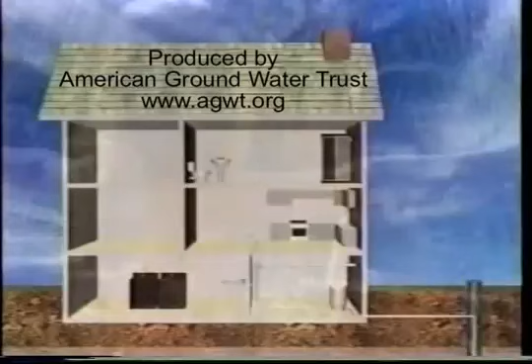Not many people know how wells and water systems work. So let's take a look at the key parts that make up a typical home water system.

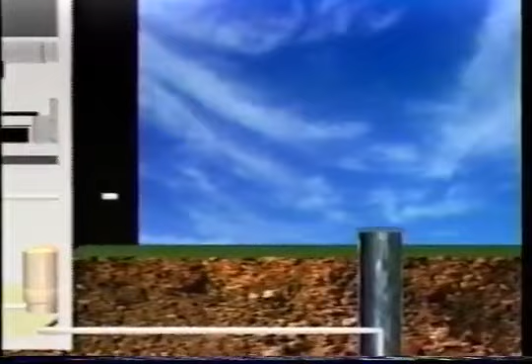First is the well itself, a shaft or deep hole in the ground extending down into the water-bearing formations. The average well is about 200 feet deep, and most are drilled by specialized drilling equipment.

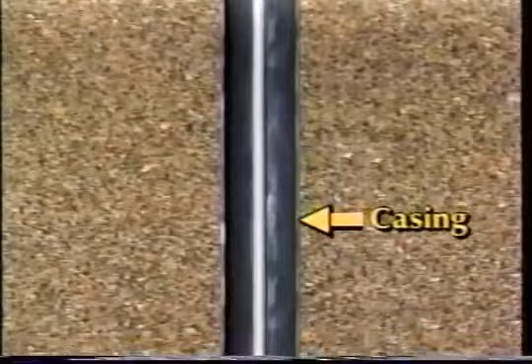Casing must always be placed in the top part of the drilled hole to prevent the risk of surface water getting into the well. In some types of rock formations, casing may extend much deeper to prevent the hole from caving in.

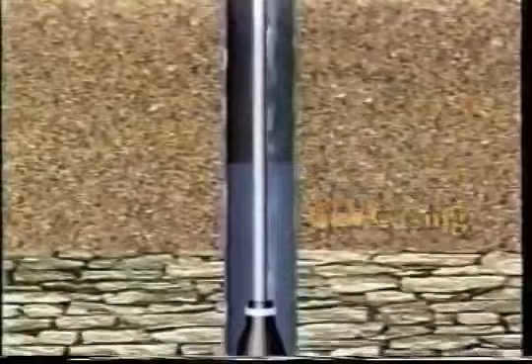Some wells use a well screen to let water in and to keep sand out of the well.

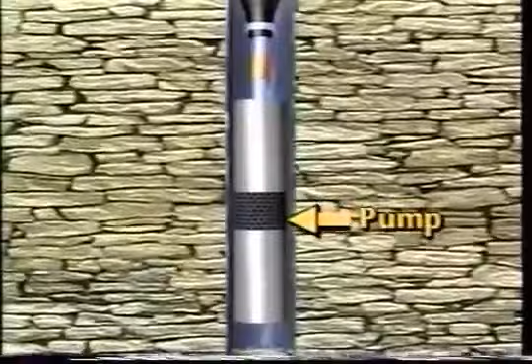A pump is needed to get water out of the well and into the home. Water from the aquifer is pumped from the well into a pressurized tank, which stores water for use when the pump is not running.

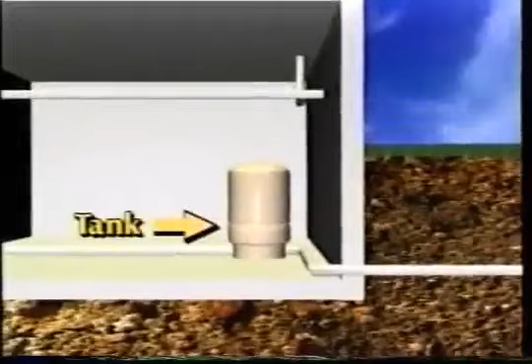From this distribution point, water is piped to individual use points in the home.

The planning, design, and construction of a water well and home water system needs to take account of geology and environmental conditions at the building site.

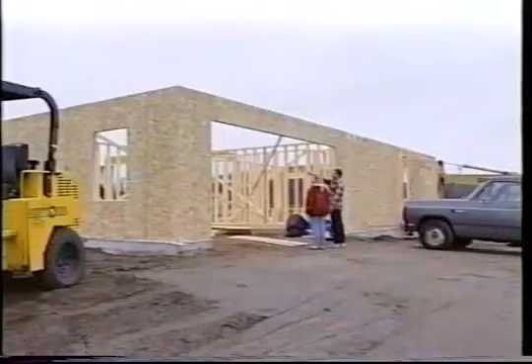The first step is proper planning. How much water is required to meet the needs of expected water usage in the home and garden? Where should the well be drilled? What well yield will we get? What water system equipment may be needed to provide a reliable supply?

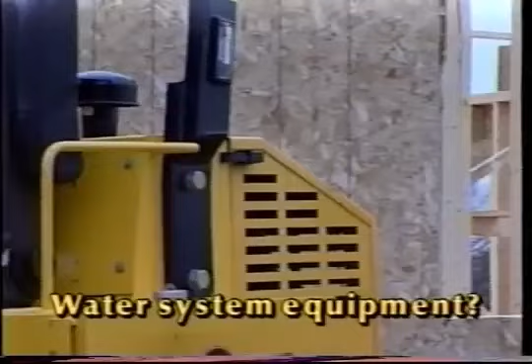The builder or homeowner should get expert advice about the availability and reliability of local groundwater and the safest place for drilling before the first dirt is disturbed.

This is the time most prospective well owners turn to experts. The drilling contractor will have current information on any state and local environmental restrictions and permits required for drilling, as well as mandatory construction standards for water wells.

The driller can recommend the best place for a well based on the character of the soil and bedrock and the required distance from other structures or possible sources of contamination.

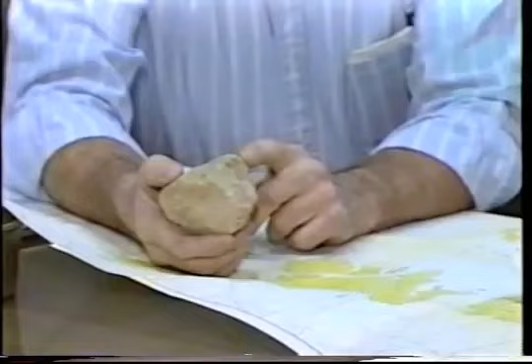A water well contractor with extensive experience in the area will have records of previously drilled wells. These records provide helpful information on the location, depth, and typical water yields from nearby wells.

In low-yielding rock formations, a well probably will need to be several hundreds of feet deep in order to provide adequate supply. But a well yielding as little as a half gallon a minute can still provide 700 gallons a day, more than enough for a family's needs.

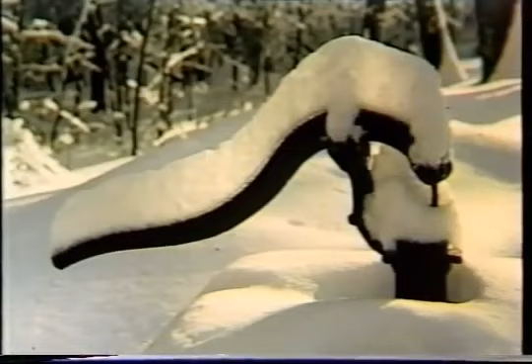Homeowners need to know the capacity of their well. Virtually all wells will provide enough water for in-house needs, but not all wells can support garden and lawn irrigation systems. Back in the early days of rural settlement, water wells may have just been hand-dug holes in the ground.

Today's water wells use modern technology to efficiently reach the aquifers, and contractors use accepted well construction methods to ensure that the well is safe from any surface contamination risks and will give the best yield available from the formations.

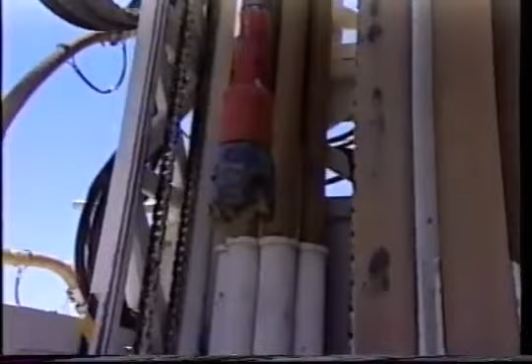Several techniques are used to drill water wells. The most common is the rotary drilling method. Other methods are cable tool, jetting, and driven well points.

In rotary drilling, a drill bit is attached to a string of drill pipe. As the drill string is rotated, the bit acts as a grinding machine.

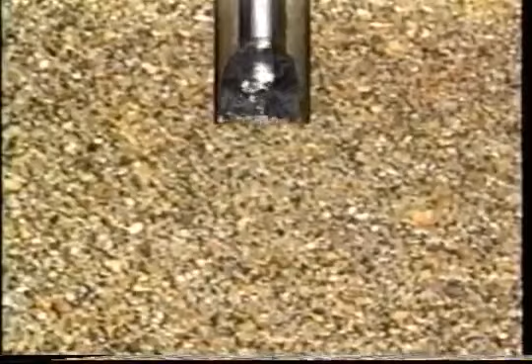Cuttings are flushed upward and out of the hole by circulating a special drilling fluid called drilling mud down through the drill pipe and back to the surface.

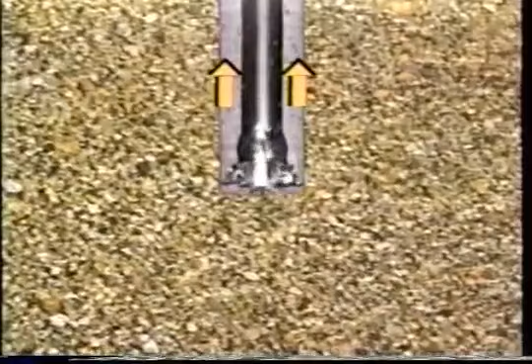This drilling fluid also serves to cool and lubricate the drill bit, and by stabilizing the wall of the hole, it can prevent possible cave-in before the casing is fitted into the hole.

In areas of hard rocks, many drillers prefer to use a rig that operates by compressed air to operate a downhole air hammer to break up the hard rocks.

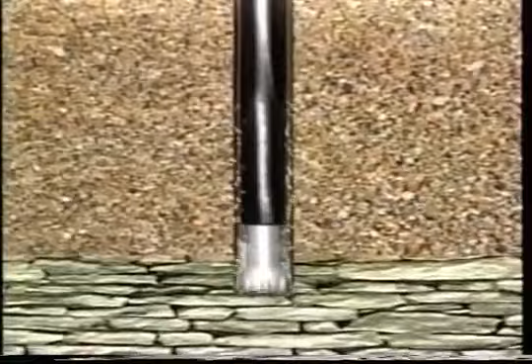The compressed air also blows the crushed rock fragments to the surface and any water that flows into the well during drilling.

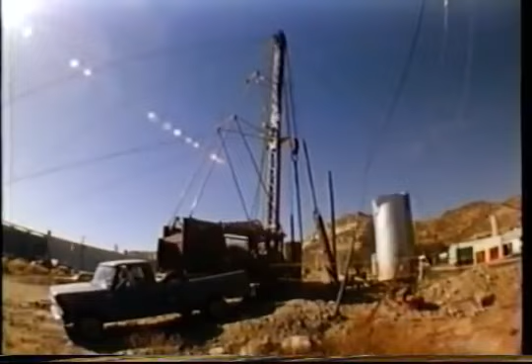Another drilling technique uses a pounding machine, usually referred to as a cable tool drilling rig. With this method, a heavy bit is attached to the end of a wire cable, is raised and dropped repeatedly, pounding its way downward.

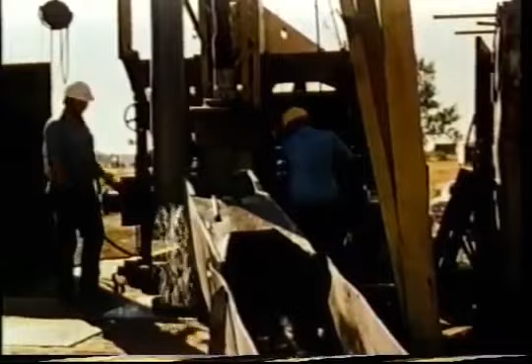Periodically, cuttings are bailed out of the hole. The method is slow and in most places has been replaced by rotary drilling. The cable tool method is responsible for millions of successful wells around the world.

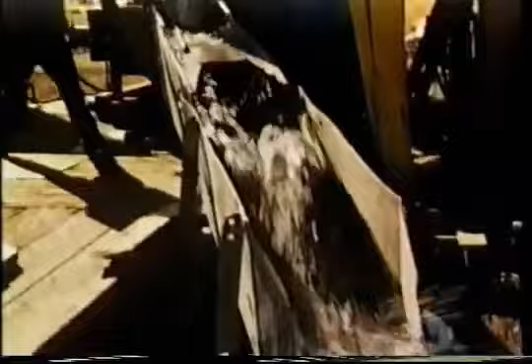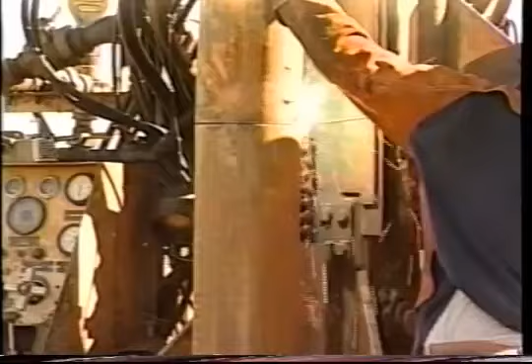No matter which method of drilling is used, the hole is usually lined with steel or plastic pipe called well casing. The type of casing used is determined by local geological conditions and the chemical quality of the groundwater. In most states, there are recommended well construction standards.

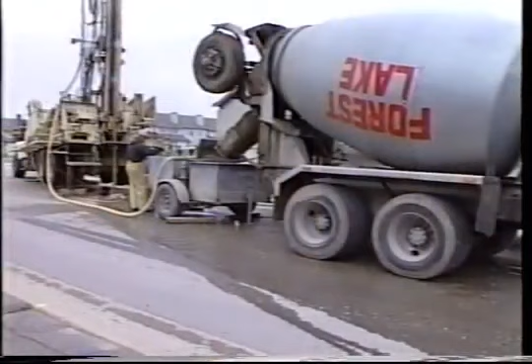The diameter of the drilled hole is usually an inch or two wider than the diameter of the casing. The space between the drilled hole and the casing has to be filled to prevent surface water from migrating downward along the outside of the casing and contaminating the aquifer.

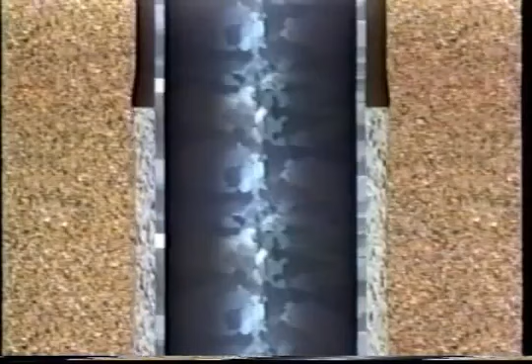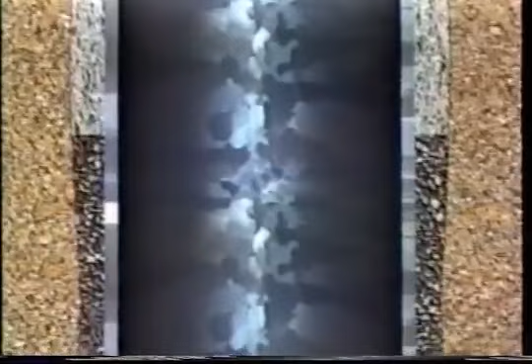This filling is called grout, and it may be either cement or a special clay called bentonite. Sometimes most of the space is filled with fine rock pieces from drilling, and then the top 20 feet is grouted with cement or bentonite.

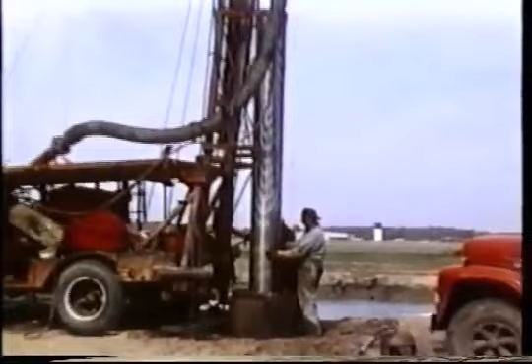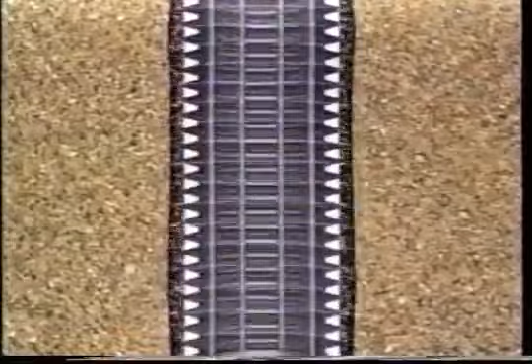If the well is drilled into rocks that are crumbly, or into sands and gravels, a well screen probably will be needed. The well screen is a sieve or strainer-like cylinder attached to the bottom of the casing. It allows water to flow into the well while preventing fine rock particles or sand from entering.

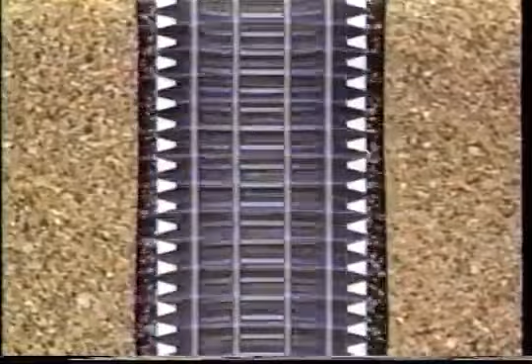Well screens are not all the same, and the well driller will select the opening size of the screen depending on the size of the rock fragments or sand that make up the aquifer.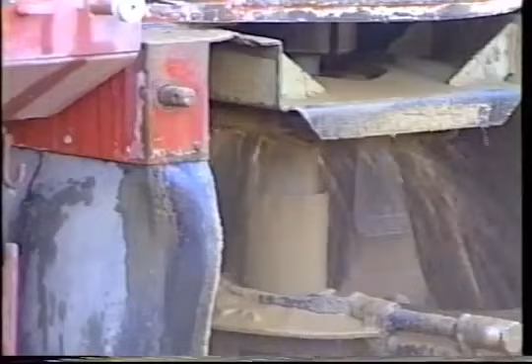With the casing and well screen or other intake in place, a flushing or backwashing of the well may be performed to eliminate loose fragments and stabilize the area immediately adjacent to the well intake. This is called developing the well.

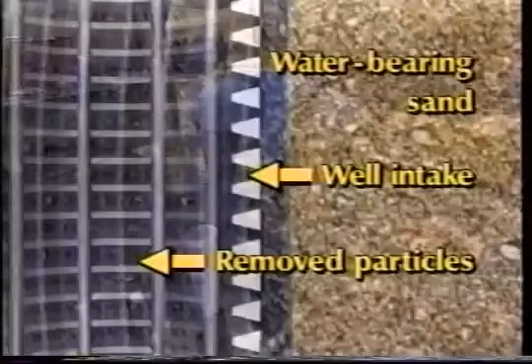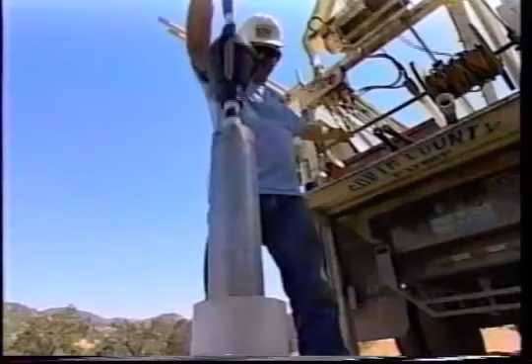Water is pushed from the well to the surface by a pump. For deeper wells, and those at least 4 inches in diameter, an electric submersible pump is usually installed directly in the well. The electric motor turns impellers in the pump, which cause water to be pushed upward out of the well. In some wells, especially in narrow diameter holes where the depth to water is less than 25 feet, a shallow well jet pump may be used.

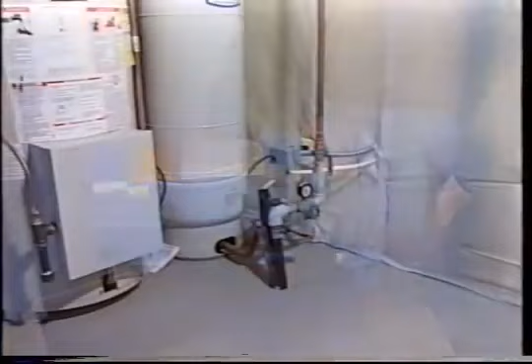Above ground deep well jet pumps, also driven by electric motors, cause water to be pushed out of the well. Jet pumps have to be protected from frost, and in northern states are often placed in a home's basement.

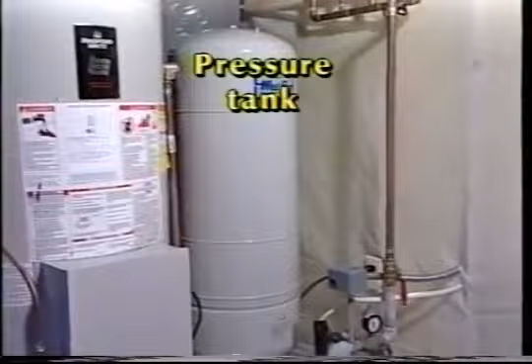Most home water systems include a water storage pressure tank, usually located in the basement or utility room. An important purpose of the pressure tank is to keep the supply of water to the home's taps and fixtures at a fairly even pressure.

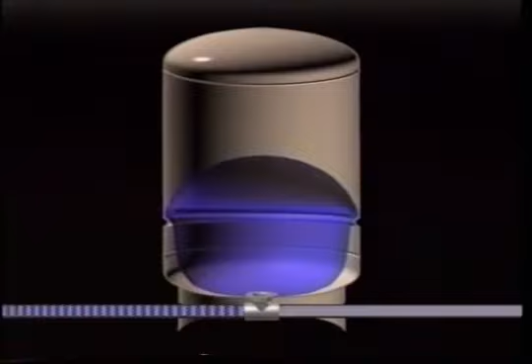The pressure tank also stores several gallons of water, so if you only use a small amount, for example just filling a glass, the pump doesn't have to run during that time. A pressure switch controls the starts and stops of the pump whenever water pressure drops below a preset level. The pressure in the tank is restored each time the pump runs.

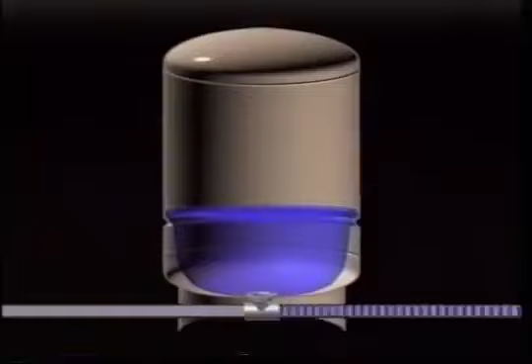To show how a typical water system works, let's follow a drop of water on its journey from the aquifer to the home.

Here is the water drop deep underground. It has been moving slowly through the formations for a few years since it first entered the ground as a raindrop. Right now, there is very little movement of groundwater in this aquifer.

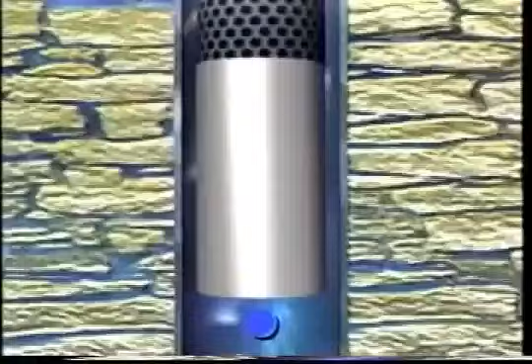Now, what happens when the tap is turned on? At first, the water comes from the pressure tank where it is stored, but as more is used, the pressure switch starts the submersible pump.

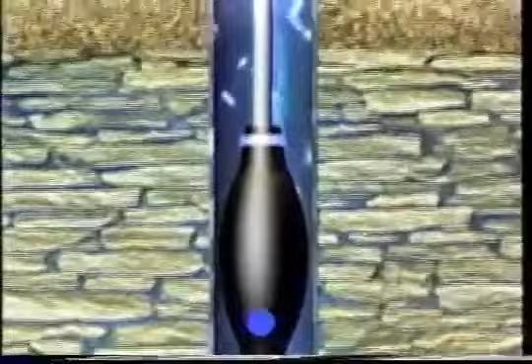When the pump switches on, our water drop moves from cracks and fissures in the formation, through the well screen, and into the well. Once in the well, the drop is slowly drawn upwards toward the pump. It passes through the pump intake and is swirled around by the pump impellers and pushed up a pipe. It travels up the pipe into the house.

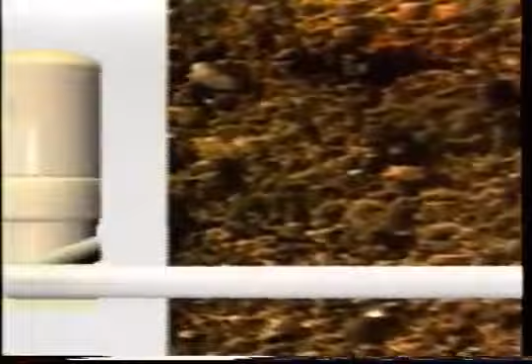Once it enters the house, it goes into the pressure tank. Then it may temporarily stop if the people in the house have turned off the tap because no more water is needed at the time.

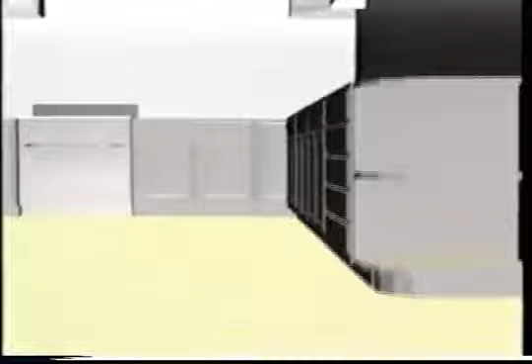Now the tap has been turned on again. The water drop flows out of the pressure tank and through any water conditioning equipment, in this case a water softener. The water drop passes through the softener, enters the plumbing system, and emerges at the kitchen tap, from aquifer to coffee maker in the space of a few minutes.

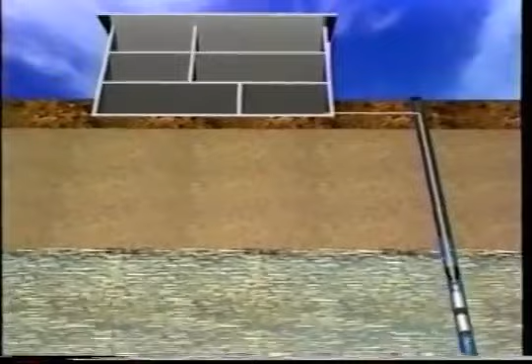Homeowners need to check their water systems from time to time. An annual water test is a good idea, and most water labs will provide sample bottles and instructions. Every few years, a professional contractor should be called in to check that the pump, pressure tank, and conditioning equipment, if you have any, is working efficiently.